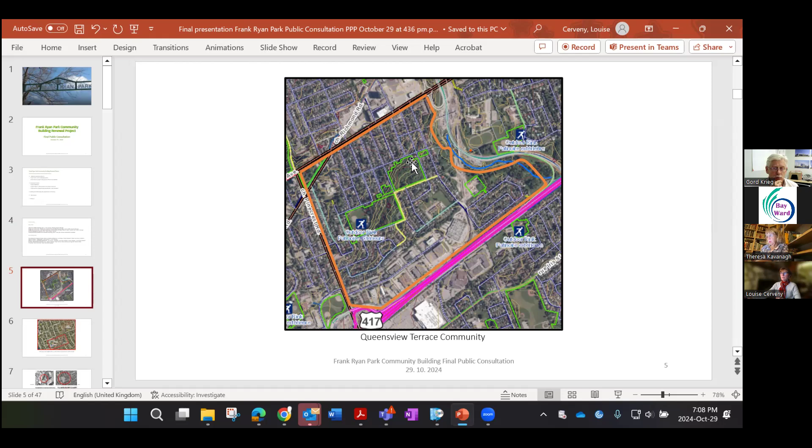Just to give you an idea of the neighborhood and where this park is located and its association with other green spaces - this is our park, and it is associated with a variety of green spaces and parks in this neighborhood. Elmhurst Park is mostly a green wooded area diagonally adjacent to this park across the street, which makes it one of the largest urban forests in the city for an outer urban park.

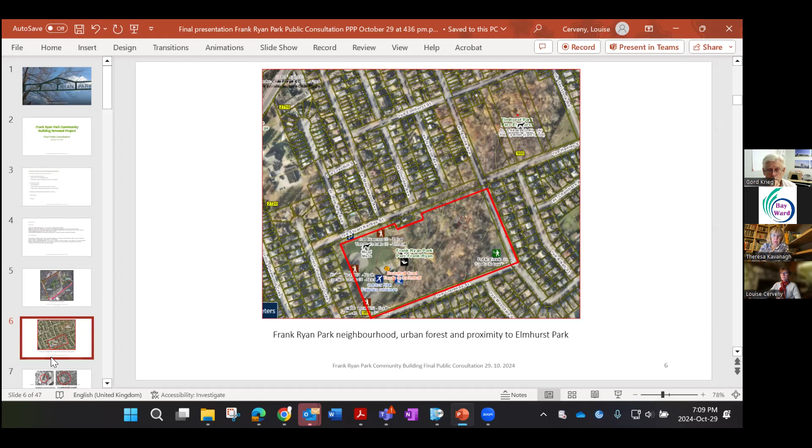These are air photos that predate the construction of the existing park, from 1956 until the park was constructed in 1958. Before the park's construction, it was farmland, and then slowly parts of the forest were cleared away to construct baseball diamonds, predominantly, that are still there today.

By 1965, there was a pool, and 1967 saw the construction of a community building—sorry, a small field house.

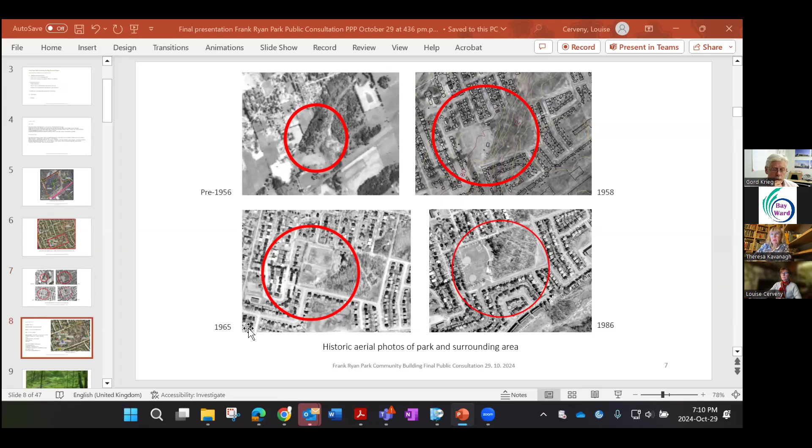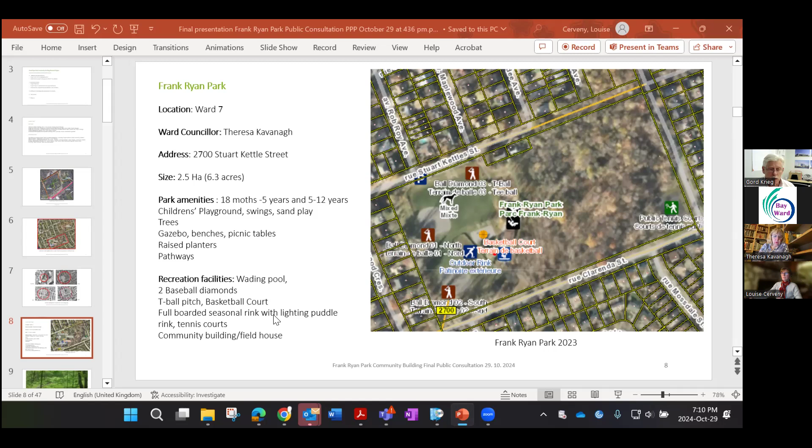The amenities that exist in the park today include the children's playground, sand play, swings, as well as a gazebo, benches, picnic tables, raised planters, pathways, trees, and the recreation facilities include the wading pool, 2 baseball diamonds, a t-ball pitch, basketball court, the full boarded seasonal rink with a lit puddle rink, the tennis courts located in the corner along Alpine and Clarenda, and the community building or field house.

The objectives of this project are to replace the aging field house and to update the park where it's impacted by the new, larger field house or community building footprint.

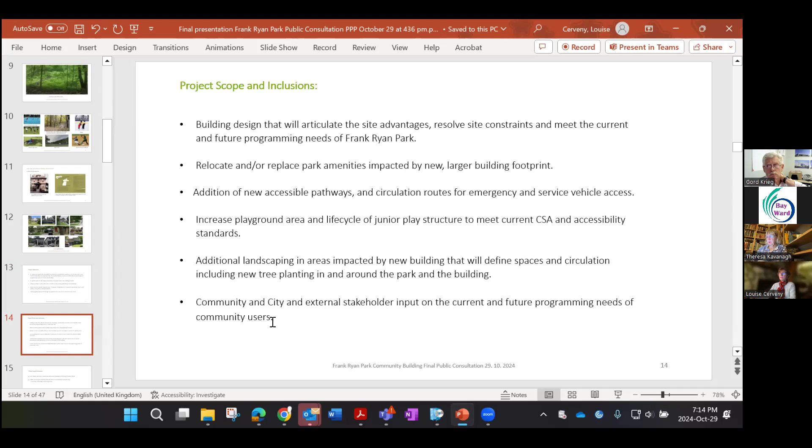Any design, removal or construction that's not identified in the scope of work is excluded from the park project. And any other projects, including life cycle renewal and initiatives funded by the Community Partnership Grant Program, are also excluded from this project.

The area that is going to be impacted is seen here on this drawing, and there will be a slight widening of the pathway as well.

The playground will be impacted, the basketball court, the pool area, landscaping around the pool area, and the removal of some existing trees, which forestry has given us permission to do as we increase the number of trees as part of this project. And the addition of new pathways and seating areas.

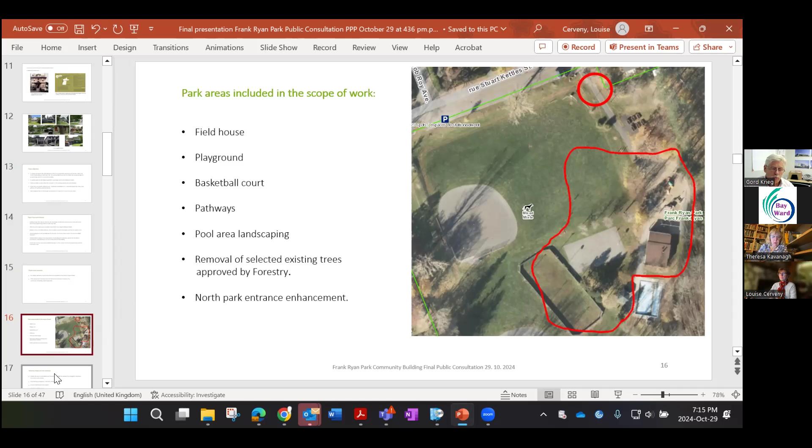Some of the site constraints include the area where the new building will be constructed, standard accessibility requirements for emergency and operations and maintenance vehicles, the geotechnical investigation—so proximity to the bedrock for the building and for any other excavation that is required—and there is a new fire hydrant that will be brought into the park.

This is a requirement by fire because the existing hydrant is on Stuart Kettle and the distance is too far to accommodate the hoses in order to put out a fire if there was one in the park around the new building and the playground.

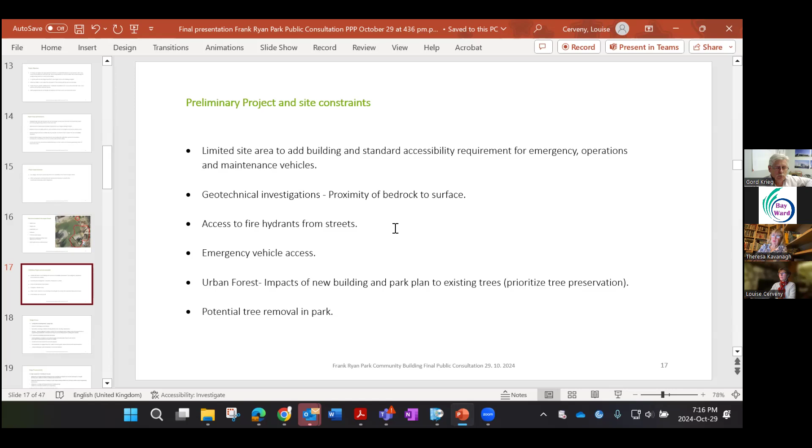So the design process includes researching the background and history of this area, which we've already done, creating site analysis and existing conditions information and sketches, infrastructure, servicing, tree inventory, doing some preliminary concepts for the new building location, as well as the impacts of other amenities in the park, and showing the constraints and scope of work included in this project.

We presented the first set of concepts with the building and park designs that we would be moving forward. They were posted on Engage Ottawa afterwards, and a 2-week comment period was provided for comments from the community.

We took the comments that were provided and moved forward with the design, refining the building characters, the materials and finishes, and further developed the site plan to accommodate the relocation of some elements, like the basketball court, adding the fire hydrant, increasing the size of the pathway to accommodate emergency vehicles, and increasing the landscape treatment around the building, as well as improving the design of the playground.

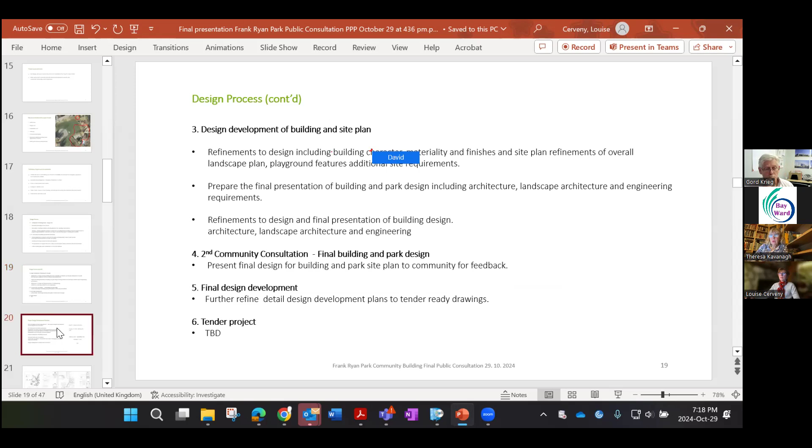The project development schedule will be posted as well, and we've already been through the concept phase, the first presentation, and the design development, and we're here today with this presentation.

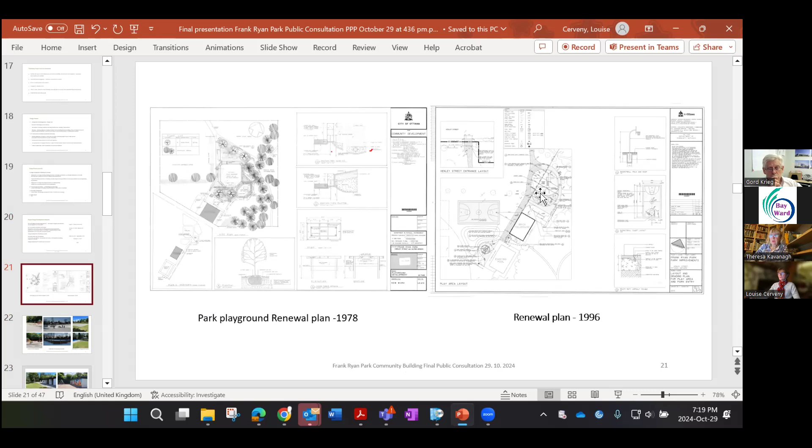Moving forward, here are some photos of the playground renewal back in 1978, when the playground was first developed. The play structures were renewed in 1996, and that is what exists today in the playground. The community rink is a major feature in the winter for this community, and really well used and maintained by the community.

I'll hand the presentation over to Jim Lennox, the landscape architect, and he can talk about the landscape architecture component of this project. Wayne, you can go ahead with that. Yeah, my pleasure.

During the preliminary design phase, we made a few key discoveries, such as the area around the existing building is too congested currently. There's an opportunity to locate the building centrally and form strong relationships with the surrounding amenities like the rink, basketball court, the playground, and the pool. The forest setting should be protected, but also utilized for inspiration and for shade. Greater visibility and emergency access from the road is needed, and conflicts between amenities such as flying baseballs we will need to be mindful of.

So these are a few preliminary sketches. The first one, locating the building centrally, is ideal, but there was insufficient room for the basketball court and playground by the forest. So in sketch 2, we considered locating the building closer to the road in the open lawn, but that would disconnect it from the pool and put it in the line of fire for baseballs. In the third sketch, the layout worked the best with strong connections between amenities and space to utilize each amenity to its fullest.

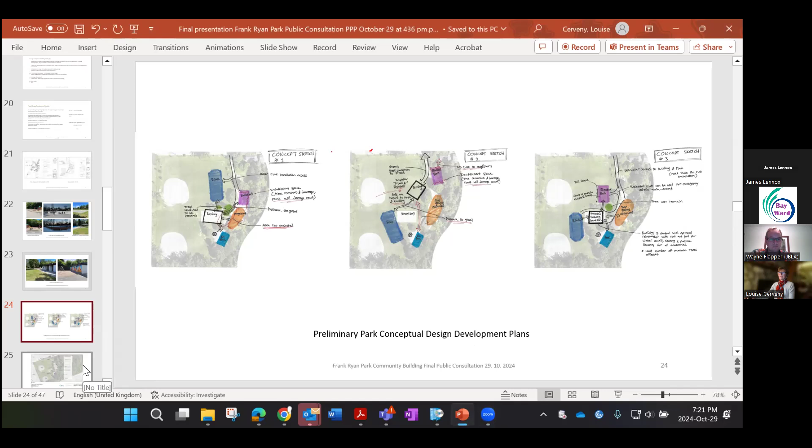Here we can see a graphic overview of how the proposed features fit into the site. Entering the site from Stuart Kettles, the existing Frank Ryan sign will be renovated to fit a fire truck, and a fire hydrant will be located close to the existing T-ball diamond. The basketball court will be in a highly visible location and double as a turnaround point for emergency vehicles. The playground area will be expanded drastically, and there is space for a shaded picnic area as well. The building is oriented with essentially 4 fronts to serve the pool, rink, playground, and the basketball court.

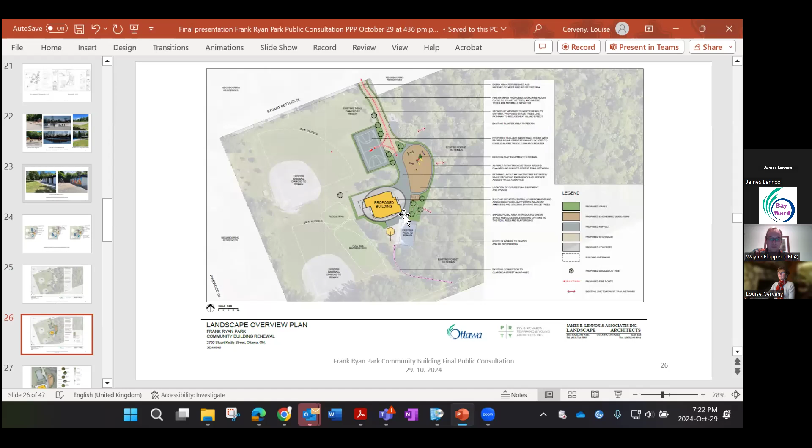Next slide, please. So this landscape plan offers a view into what each area will look like. We took inspiration from the unique forest setting to develop our plan with organic shapes, materials, and colors. The design takes advantage of shade provided by the mature trees. We're hoping to utilize boulders uncovered during excavation as well to help blend the building to the natural landscape. Around the building, we designed an oval plaza which guides circulation around the building and defines the space. It accents the building as a focal point and creates a flow through the site. The front and rear plazas will be excellent seating and gathering areas. Additional features are a covered patio by the rink with a large skate changing bench and a retaining wall for shaded seating. Next slide, please.

As mentioned earlier, we're using a complement of natural forms and materials. Stone dust is spectacular for permeability, drastically reducing hard surfaces needed. Site furniture such as bollards and benches are all being selected to fit this theme while maintaining durability. Overall, the landscape design we settled on uses the space well through natural organic forms, a variety of seating options, and thoughtful consideration of what makes this location unique. Thank you very much, Wayne.

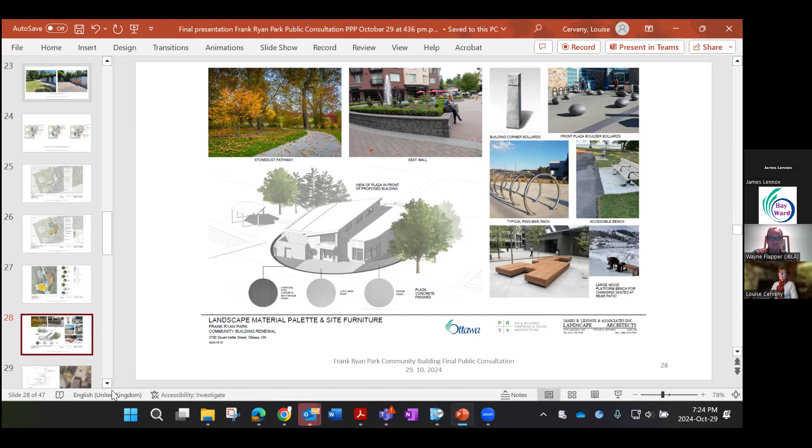We'll move on to the architectural part of the project, which is the community building.

As you can see, this is how the existing building fits into the park. The plan that Wayne just talked about extends far into the footprint of the building, and the new building fits here.

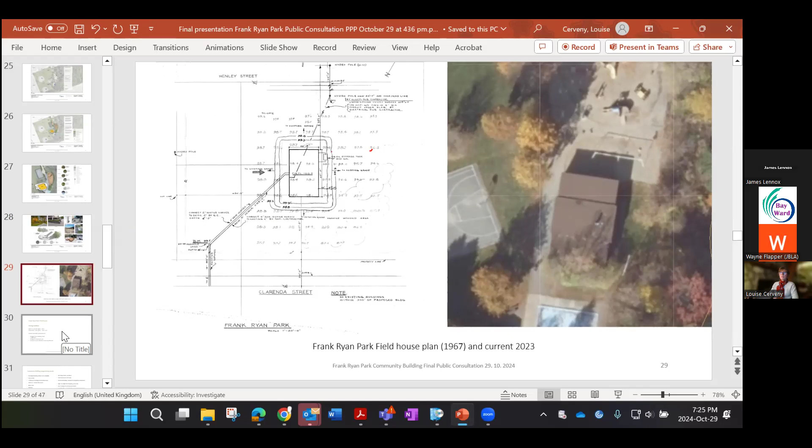You can see where the building is on this old plan, which was one of the original drawings for the old building. It was built in 1961 and is approximately 2,000 square feet. The new building is almost twice that size.

It includes a change room, meeting room, a washroom, storage for chemicals, and a storage area for the snow blowers, hoses, and shovels.

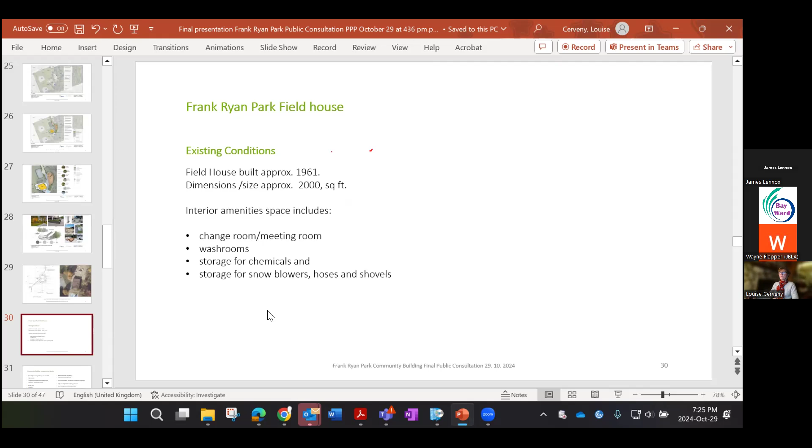The new community building programming will pursue a higher level of energy efficiency and sustainability that exceeds the provincial building code. It will be fully accessible, have 2 multi-purpose meeting rooms, including storage in each room.

There will be 3 washrooms, a male, female, and universal washroom. There will be a kitchen that includes a stove, refrigerator, and dishwasher, with an accessible lowered counter and accessible sink.

There will be a cloakroom at the main entrance to the building on the east side, change rooms with outdoor access, a change room, storage, and washroom with outdoor access. The washroom is located within the change room and accessed from the outside.

The rink storage and snow blowers, a pool maintenance and staff storage room. There will be a maintenance and operational area for the building.

There'll be much brighter light, bird safe glass, and a passive solar aspect to the building because of the glazing. Views to the playground, the pool, and the park amenities, as well as accessible pathways around the building to connect the building to the street.

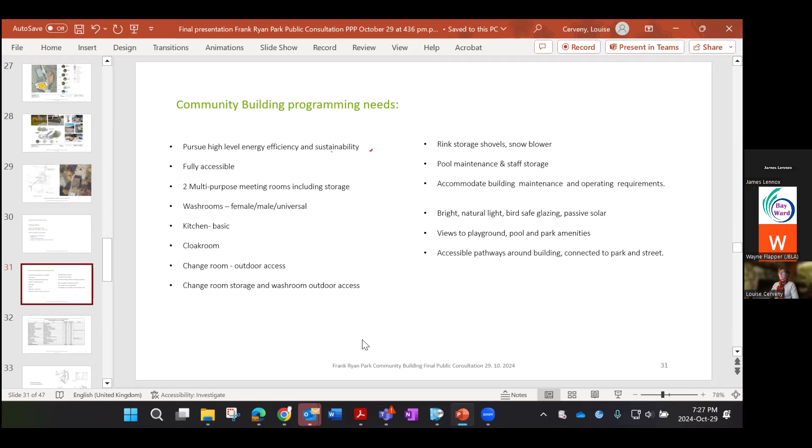This is a demonstration of the programming breakdown of each room, as well as the square meters of each room. This will all be posted online, so you'll have access to this presentation.

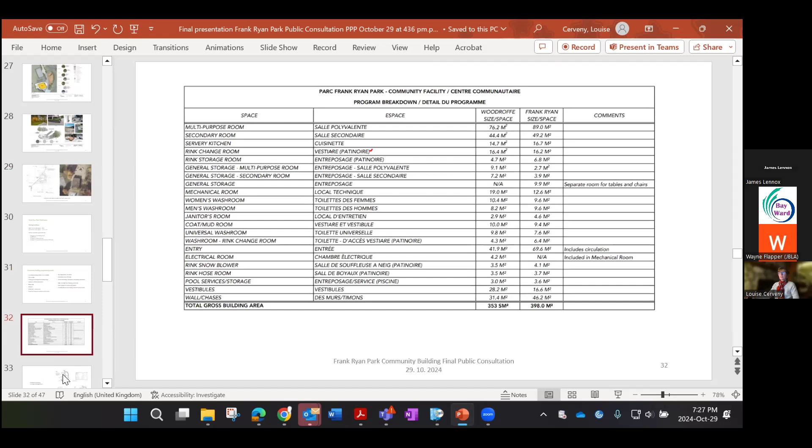Sure. What you see here are some of our preliminary conceptual designs that, in concert with the landscaping, we were working on together with them to locate the building and try to get a shape to the building and orientate the spaces. So these were part of the previous presentation, and we've worked since then, but the top left-hand diagram...

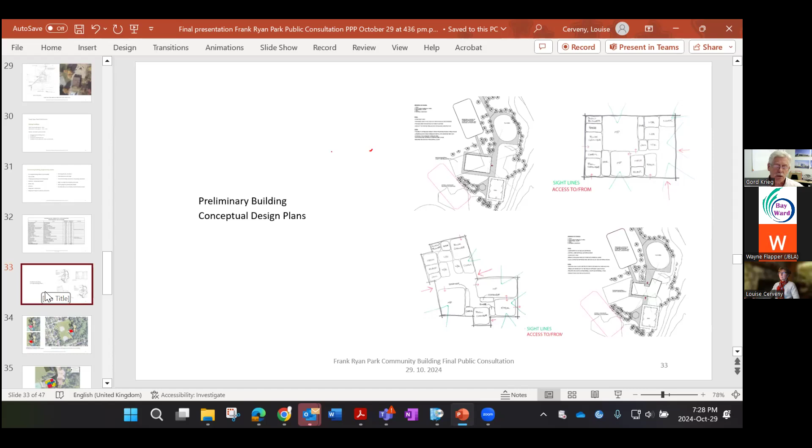...is basically where the building is, although that had the rink to the north of it. The next slide is again from the previous one, and it was just showing the main elements and their location and a general shape of the building, although it was just very rudimentary at that time.

This showed the building with a preliminary layout. Just locating the orange are the multi-purpose rooms, and the blue is a central organizing area, gathering area. That came out of the sketches that you saw earlier, and this is basically as far as we got at the last presentation, and this just proves the area calculations that we got...

...all the spaces correctly, and started relating the spaces to the elements of the park, both the new landscaping elements and the existing pool and rinks and ball diamonds.

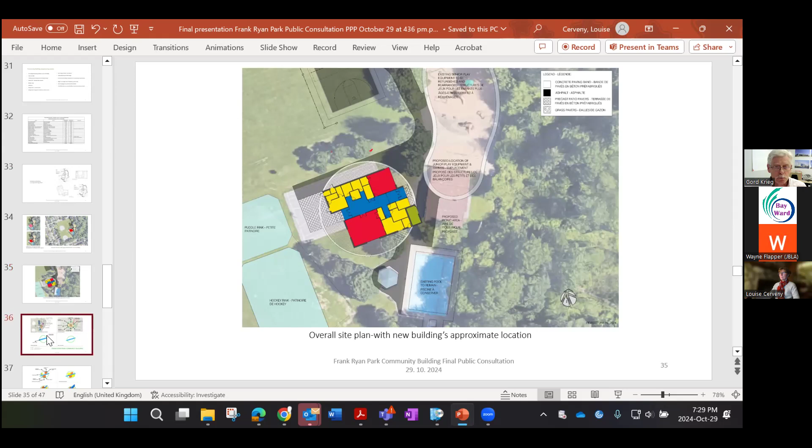So the image on the top left was the sketch that you saw in the landscape one. That's where we placed the building sort of in the middle of elements. Those elements moved around the building, but the idea is that it was that building location seemed to be the one that worked the best for helping improve the playground, etc.

So we took that and we realized that the views from the building in the top right hand corner, sort of almost like a circle, where it's a 360 view from the park to the building and from the building to the park. So you see the pool and forest area and the playgrounds, basketball to the north, and then the ball diamonds and rinks to the west, and the south is the remainder of the park.

So we took that idea of the circle and this idea that you enter on the east side, but there is a very strong connection to the park on the west side.

So to create an axis and a central space in the middle of the building. That was sort of our organizing elements, was this movement through the building and a central organizational spine, and this idea that we try to get as many views from around the building as possible.

Now we do have constraints with trees, and we got to get movement around the building. So we have trees to the north and trees to the south that forestry wanted us to retain. So we squashed the circle a bit and came up with an oval to make it fit more into the site.

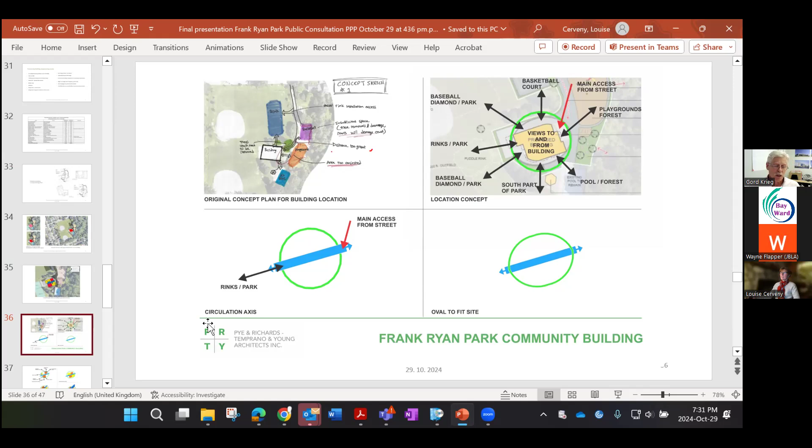And then that element also translates into the landscape. Next slide. So then we took that on the top left-hand corner. This comes from the old plan, but just keeping to develop it. So we put the main rooms in orange there with the views.

So the one room you see the playgrounds, the basketball court, and the baseball diamond, and the other one is the pool, the south part of the park, and the baseball diamond. And then there's a strong connection between the rink and the building as well, because in the winter most people will be going into the rink change room.

And so we took that on the top right hand corner and we filled in the building with all the service spaces. And then in the bottom right hand corner, you see that we wanted to give that central spine some volume. So we thought of it as a high space where we could bring light in from all levels. So that became our major circulation and axes to the building.

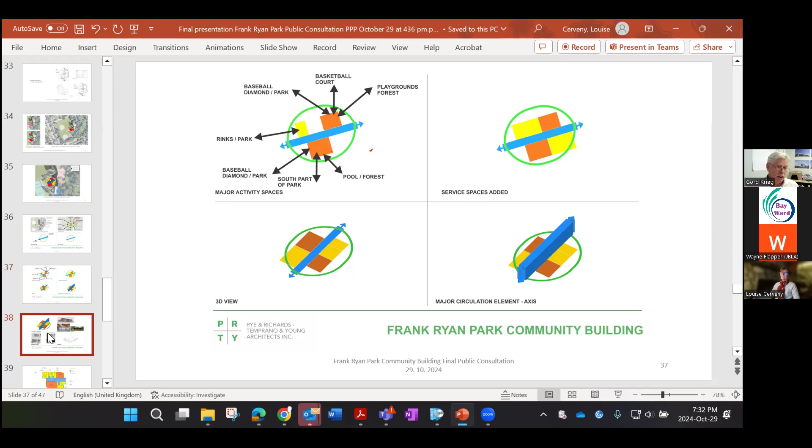And now we're trying to develop what the building looks like. So in the top left-hand corner is sort of the blobs of the building and with this spine. And then we did some massing studies.

We took some of our photos that we had thought of a long time ago when we first started designing the building, and they were in the previous proposal maybe, but they're just some concepts that we like that maybe could inform the building. And then we did some massing studies.

You see one on the top right hand corner there, but on the bottom left we played with roof lines and shapes and whether we needed more roof levels or not.

We finally came up with the massing that you see on the bottom right hand corner, which is a high central spine that is the sort of organizing structure, and then the buildings around that. That allows us to get north light into that central space, and it allows the organization of the building.

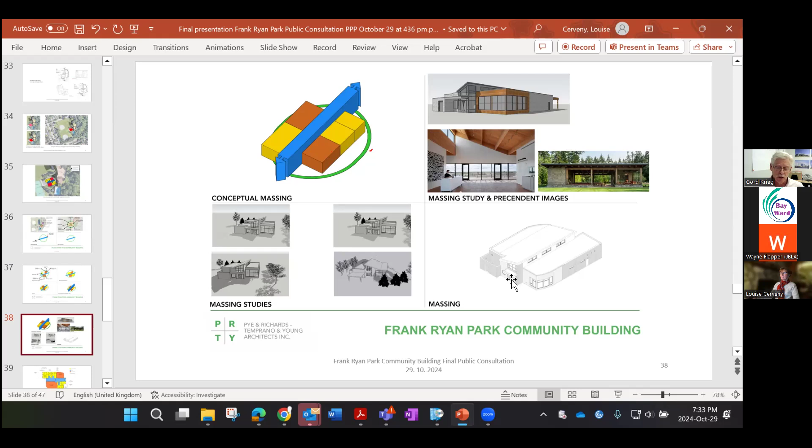So on the next slide is our updated plan. It's very similar to the previous one, except we've improved it by just working on the spaces and making them flow. So you still get the blue area, that's your central spine and meeting place, organizational structure.

The two multi-purpose rooms in orange in the corners with lots of windows. The rink change room is at the top left-hand corner, has access to the rinks, and then the other service spaces, washrooms and storage rooms, kitchen, etc., fill that in.

So the plan didn't change a lot, but we've refined it and worked on it, and then it was getting the form of the building.

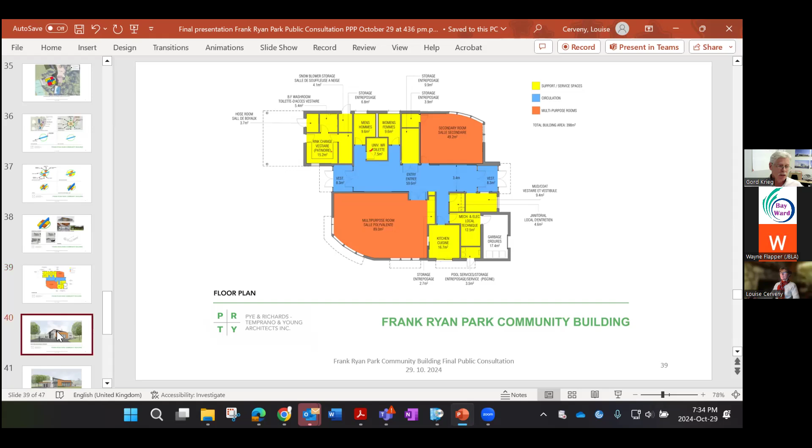Instead of just doing a bunch of steel bollards, we're using sort of stone bollards. They could double as seating areas. And that's in case an emergency truck or a maintenance truck comes around, it's not, we're protecting the building.

So this is your main view. We haven't figured out the name, how to put the name of the building on the building yet, but that will be in this area.

The area on the right is the large multi-purpose room. Instead of keeping the roof flat over that room, we joined the sloping roof on the high side to that room, creating a more dramatic look to the building. It also brings more height into the large multi-purpose room and creates a more dynamic room. But the spine is still visible through this elevation by the glass in the center.

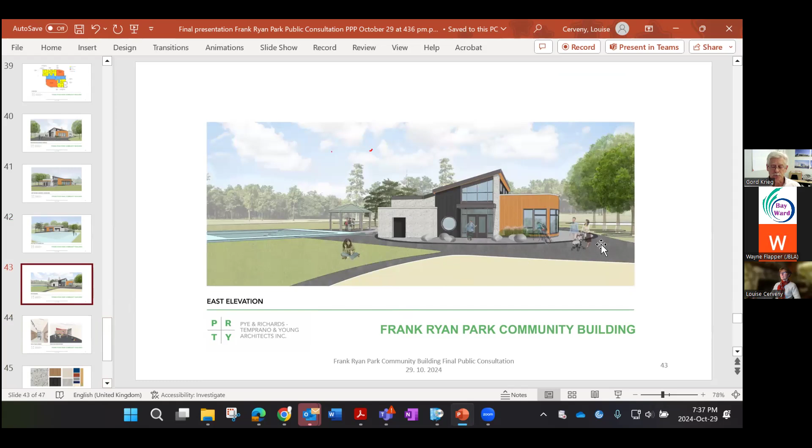We think we can do the ones in the main corridor that way. In the multi-purpose room, you can see the roof has the slope on it, so the ceiling gets some height into that room. Again, we have some wood accents, very little color accents, but just enough. We're trying to use lighting to accentuate the different shapes, so it's going to be LED bright light, but we're trying to keep it minimalistic so that it accents the shape of the space.

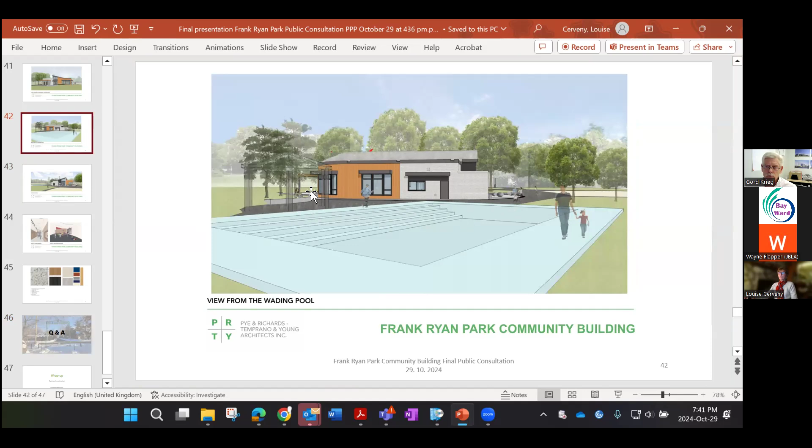So there is an exterior washroom. The users of the wading pool can either go through the front door, or through the back door or west door into the washroom, or the access to the change room will be open during the summer. So there is a washroom in the change room as well.

We have another question about outdoor fitness equipment and where that could possibly be located. I think Louise, we've discussed this. Yeah, that is not part of this project, as was indicated at the beginning. It's not identified in the scope of work, which was written in 2022, so we won't be discussing that this evening. It's another project entirely and not part of this project.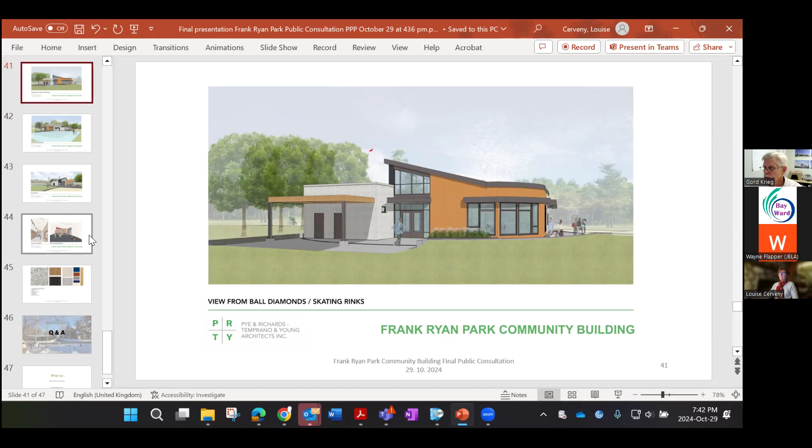We have another question about the space in the main room - how many people can it accommodate in seats or around tables? Do you have an estimate about that? So the space is designed for an occupant load of, I think, a maximum 99 people, if I'm not mistaken. Let me check - multi-purpose room would have a maximum occupancy of 100. The secondary room would be 50, and that has to do with number of washrooms, number of doors, so it's a limited number of people. You could get special permission to increase that for special occasions. I know that's been done, but that's what it's designed for.

We have a question: what's going to happen to the mural on the existing field house? We've tossed some ideas around about that mural. It is lovely, but there's no way that we can save it. The cost is prohibitive - it would mean actually saving the wall. We can't incorporate it into the building. It's just not possible. However, there were some ideas of taking a large photograph of it and using that somewhere in the park. But unfortunately we can't save it.

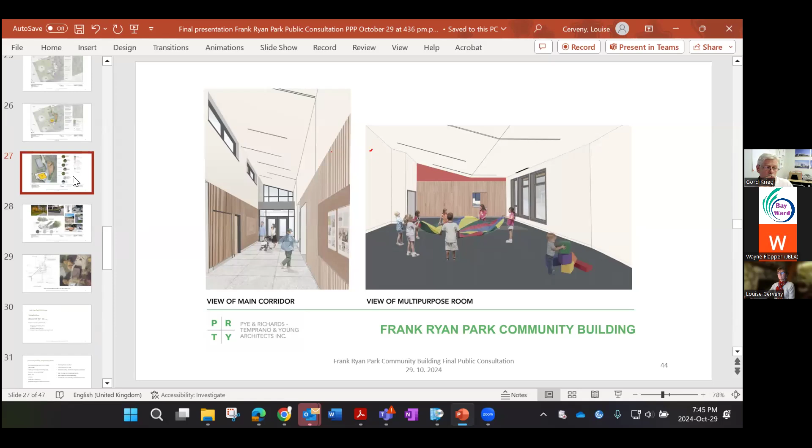How many picnic tables will be in the picnic area? Will trees be planted in the picnic area, or will there be no shade? Wayne, would you like to answer that? Yeah, I can answer that. So we're currently proposing 5 picnic tables in that area, 2 of which are fully accessible, and we're definitely providing shade - we've got 4 trees proposed. And a lot of that area is shaded by the mature forest next to it anyways, but we're planning for the future and adding to that canopy.

Where is the bicycle parking located? And will you consider spacing that allows for trailers or larger bicycles? Sorry Wayne, I'm trying to point to it - is that where it is? Yes, so that's where we're proposing the bicycle parking, right next to the front entrance. But there's nothing stopping other places in the park from having more if we decide to, correct? But that's not part of the building program maybe now. So it's a big park, you could put more.

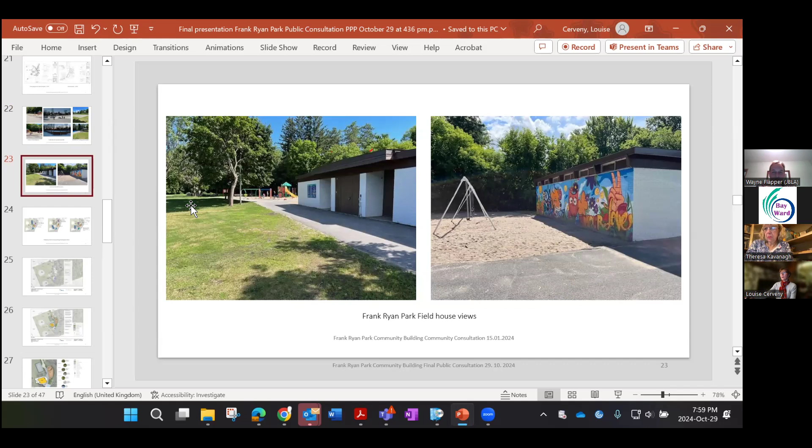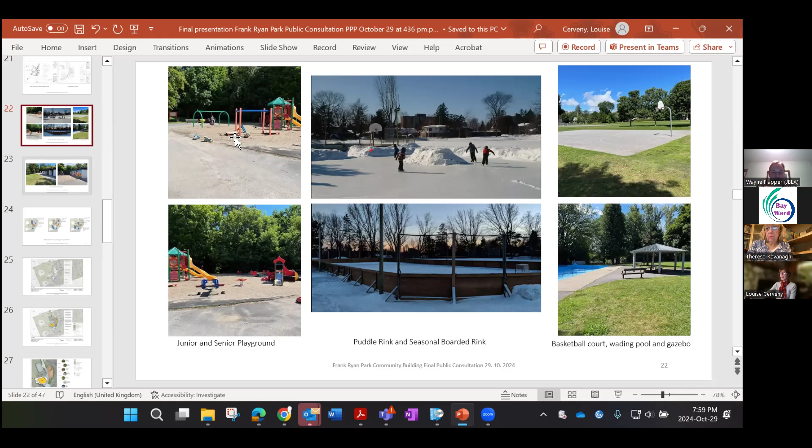So there's too much of the hard costs that would use up the budget before we even install a playground, and we wouldn't have enough room to install a rink, a swing bay, because there isn't enough room in the existing play area.

The ICIP funding must be spent before 2027. The city did apply for extensions on some of these projects simply because of the backlog of projects. Some were delayed because of COVID, but there's just an awful lot of work.

So we have until 2027 in order to spend the money from the ICIP funding on the junior play structure. And it's in the best interest of the project that we use that money when we're building the whole project. Hope that answers your question.

Lucas is wondering if the new field house will have its own septic system to accumulate waste from toilet use, sink use, or will the new building be connected to the existing sewer line? Dave, would you like to field that question? Yeah, sure. It is going to be connected to the existing sewer line. No septic.

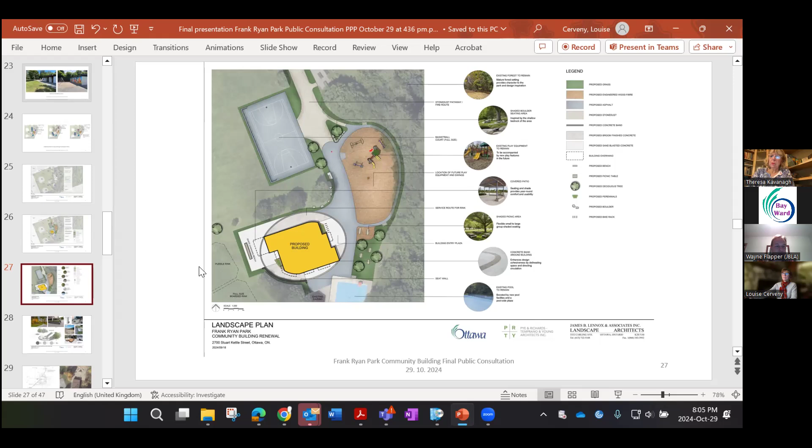Those pathways are a key consideration I've made through this whole process. So they're coming out - one of them is coming out as it was, which is the one further to the north. The one you were just at, a little bit south, that one comes out to an asphalt pathway. And then the one lower comes out to the picnic area.

I think I'm all caught up here with questions, and unless anyone has any more, or unless I missed something, let me know. I think the only one you missed was the timeline.

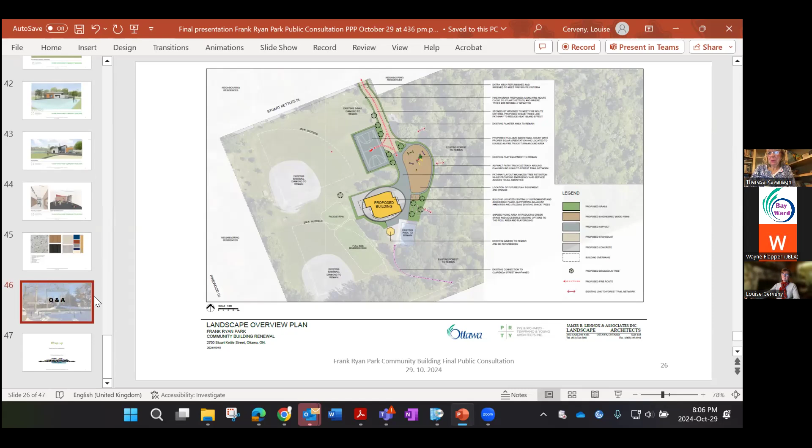Oh yes, could you reiterate the timeline, Louise, please? Yes, we'll know more in the new year. Right now there's partial funding for the building, but not enough. We need the full funding envelope in order to move forward. So in the new year, we'll be looking at other alternatives and options for funding the building. Believe me, we're looking at everything.